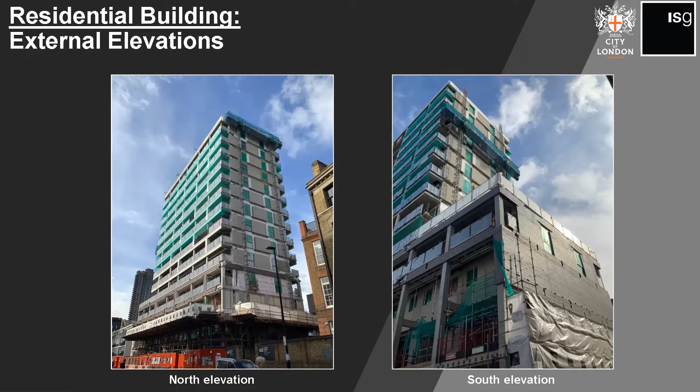If we go to the next slide please. Similar photos, one on the east elevation - I won't focus on that as we've viewed it on the first photo - but the west elevation shows that we've now removed our hoist, the scaffold tower, and the external staircase that ran up the building, and we're starting to infill those sections. All the balustrade is now being infilled, as you can see. The only sections still to be done are where the hoist runoff was. At low levels we're installing brickwork and panelling with a scissor lift, which you can see in operation towards the bottom right of the picture. We haven't installed the cradles yet because that scaffold hasn't been fully removed, but the next thing to be installed next week will be the cradles on that elevation, and then we start to bring the GRC across and complete that elevation and its finishes.

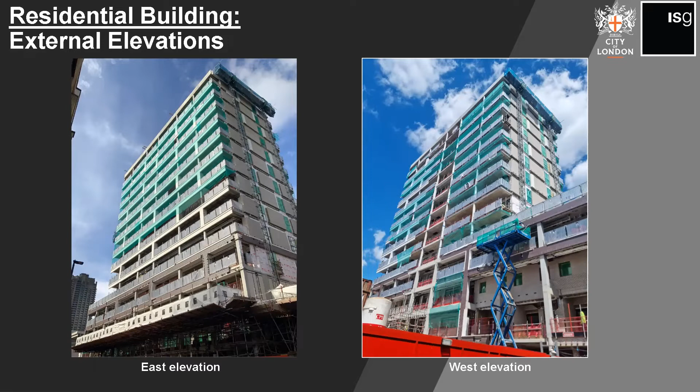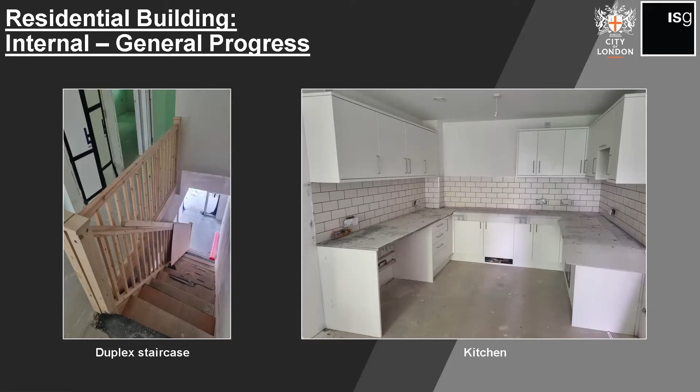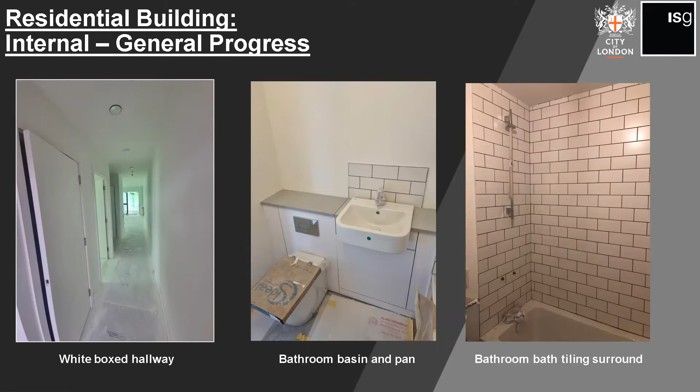Can I just go back one there, Jessica, thanks. On the right hand side, that is a ground floor workspace. We are going to utilize those workspaces for a little bit of welfare until the end of the job, but that's not their future use, so they will be fitted out by whoever takes ownership of them or leases those units, but they are now being created at the moment.

You can see on the floor that's a screed finish that's gone in, block wall at the back and some plasterboard walls at the side. And because there's flats above those units, there's some double insulated soffit there to provide the warmth to the flats above. Yeah, you can flick on now, Jessica, thanks.

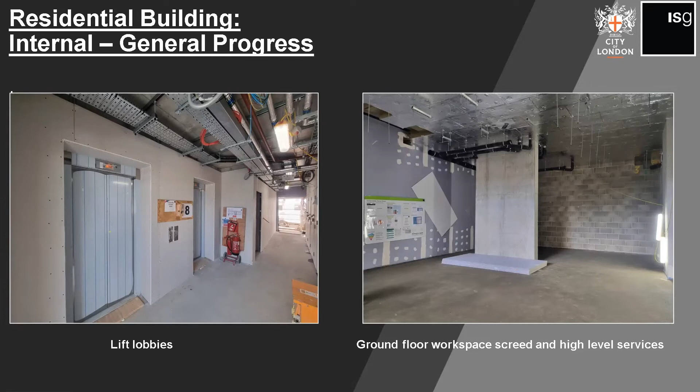Okay, for anybody interested in the service distribution, those are a couple of the plant rooms. What you see on the left hand side is the boiler room, and the square units at the back there are actually the boilers. They're quite small units, and you can see the pipe work now and all the pumps are installed. They're being lagged - that's like an armoured lagging that goes in and insulates and protects that pipe work. So those plant rooms now are very well advanced.

That room on the right, the sprinkler room, is actually in operation at the moment, since completion of the school. So that sprinkler room feeds the school and the residential building.

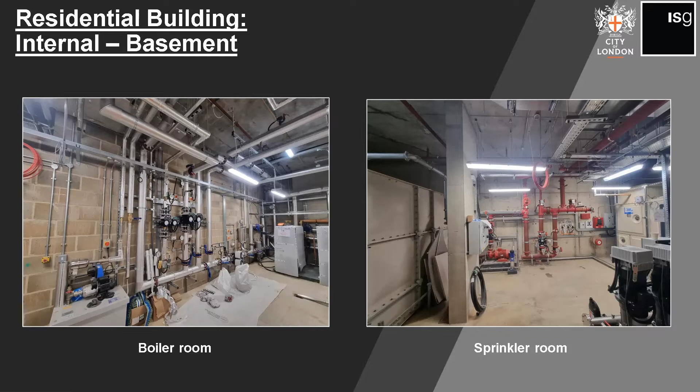Next slide please. We've got this slide in because I'm sure you'll be aware of the site hutting there. We are now at the point of starting the landscaping works, and the cabins will be removed at the end of the month, end of July, start of August. So we go through a process of removing those cabins, also taking away those temporary substations, and then we progressively commence the landscaping works. So those will start disappearing from your vision in the next month or so. I'm sure you'd be pleased to see them go.

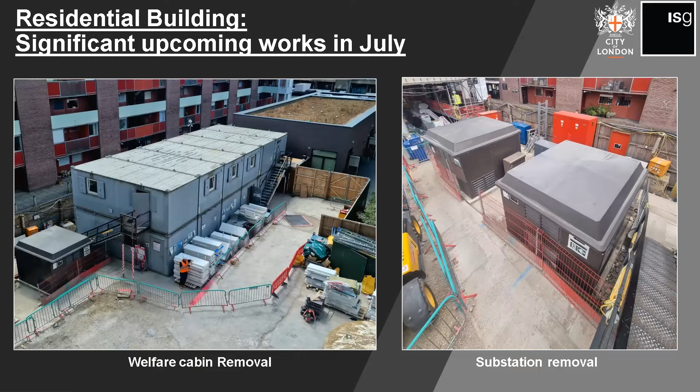Next slide please. So the general working hours are still Monday to Friday 8 to 6 and Saturday 9 till 2. In terms of COVID, we're aware that we've actually got cases increasing at the moment - there's a little bit of a surge in the capital again. So we are still managing our welfare with increased levels of hygiene and trying to separate our workers as much as possible by staggering their break times at the moment.

But yeah, the HSE guidance now is really historical guidance, but ISG still try and work to an increased level of hygiene and separation with the workforce if we possibly can.

Key milestones coming up: removal of the hoist and mast climbers to the east and west elevations happened in July. So the hoist is gone, and all the scaffolding that fed the tower around it will be removed on Friday. Mast climbers have gone on the east and west elevations and are now being replaced by roof-mounted cradles. The site huts move in July, which commences the start of the landscaping process.

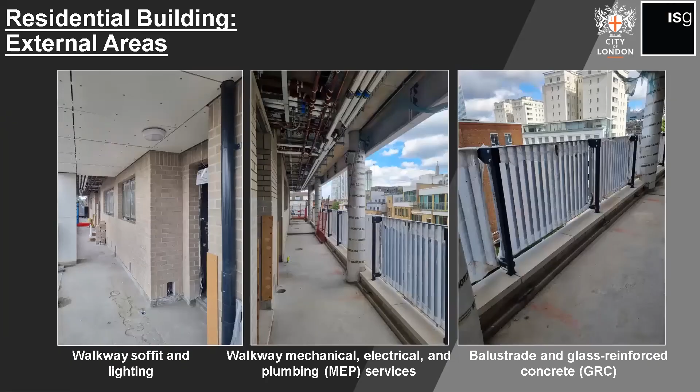And then another question about the railings - do you see any problem in having railings rather than solid barriers along the walkways? What if things fall through? Is there a risk for pedestrians walking below? John, could you answer this, please?

Are you there, John? Yeah, sorry, I was on mute there. What does building control say about railings rather than solid barriers? I think they're a standard building control approved railing. They are not a solid railing, but it's a very common design. It has gone through a consultation process with the architects, building control, and the planners. Yeah, that was what was approved for the scheme.

Is there a risk that things could fall through and land on people below? Well, I think the risk in terms of those balustrades - the design that's been chosen has a 100mm gap between the uprights, so there's a possibility that something could go through there. It's an unlikely possibility, but I guess children - it's not a play area, it needs to be a managed area.